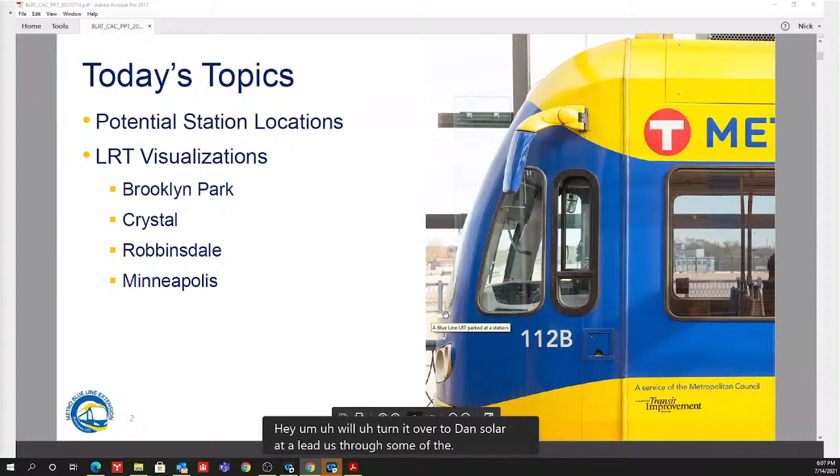Okay, we'll turn it over to Dan Soler to lead us through some of the preliminary station discussion. Well, thanks everybody, happy to see folks tonight on a rainy Wednesday, rainy here anyway, maybe stopping, but good night for a CAC meeting.

So we presented similar information on stations and visualizations that you're going to see tonight at the Business Advisory Committee yesterday, and we'll share similar information with the CMC. This information on stations and possibilities for LRT is all work that we want to engage with in our open houses and public meetings through the remainder of the month of July. So what are we doing?

We're looking for feedback so we can continue to advance where stations might go, how they're configured, and feedback on the visualizations we have—side running, center running, different configurations of LRT. After these advisory committees, we're bringing this out into the community at a number of public meetings. May see some of you there—some virtual, some in person. We've got meetings in every city, and we expect ongoing discussion for the next several months as we continue to look at what works and refine these design options.

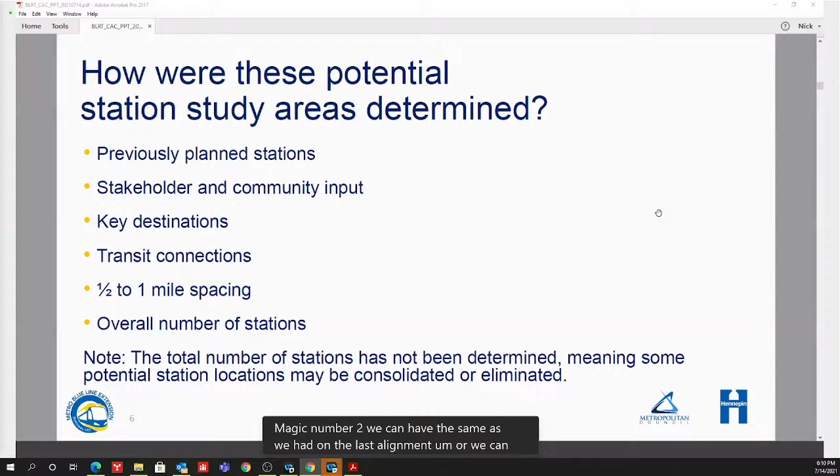We looked at a balance of the overall number of stations, so the total really hasn't been determined. There's no magic number—we could have the same as the last alignment, or less, or more. There's no real magic to it, other than: have we served all the areas we need to, and have we kept it a functioning LRT route that maximizes ridership, minimizes travel time, and picks up and serves residents and businesses, but at the same time doesn't stop every block.

The first part was very easy in northern Brooklyn Park. Up there, we're proposing that the 4 stations along West Broadway in Brooklyn Park continue and remain part of the project. This is the segment that runs from 73rd up to north of Highway 610 along West Broadway. We previously had 4 stations along that segment, and these 4 station areas have had a tremendous amount of station area planning done in and around them.

They are serving key destinations, transit connections, and are pretty much fully designed. Brooklyn Boulevard would still have a station in and around the commercial and retail area, as well as the Starlite Transit Center. Up at 85th, of course, is North Hennepin Community College, Hennepin County Library, Center for the Arts and School, Maplewood townhomes, and other development proposed and existing in and around that area.

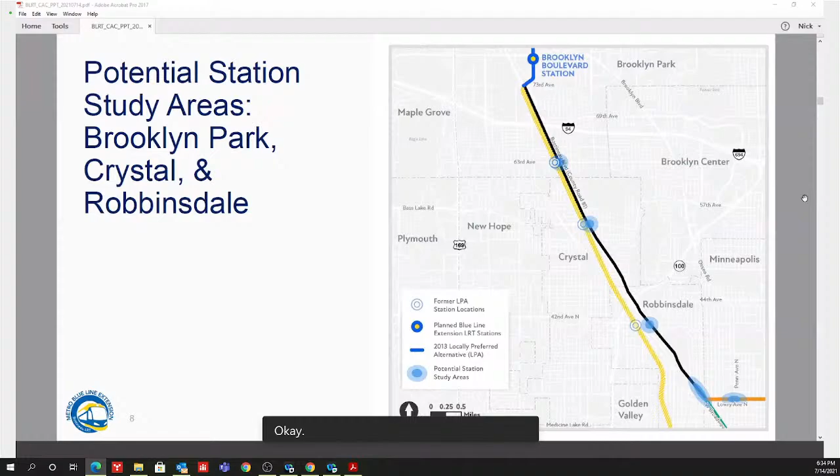There's no station on 73rd. Hello? I'm sorry, I think Kathy was asking a second question, but we lost her. The internet started buffering and we lost part of it. Yes, you froze for a touch, Kathy, and then came back. Go ahead and start again.

Yeah, so currently it looks like there's no station on 73rd. So Brooklyn Boulevard will serve the 73rd Avenue businesses and people that live over there. And the distance from 73rd to Brooklyn Boulevard appears to be a little over a mile. So I'm just wondering what was considered there in terms of reaching some of those communities and businesses on the 73rd area.

No, you're challenging me to think about the past. I know we had always proposed a Brooklyn Boulevard station because of its connection to the retail there and the Starlite Transit Center and other spots. And then, of course, the next station is south at 63rd. So I don't know if we'd considered a station in the middle. I just don't necessarily remember that.

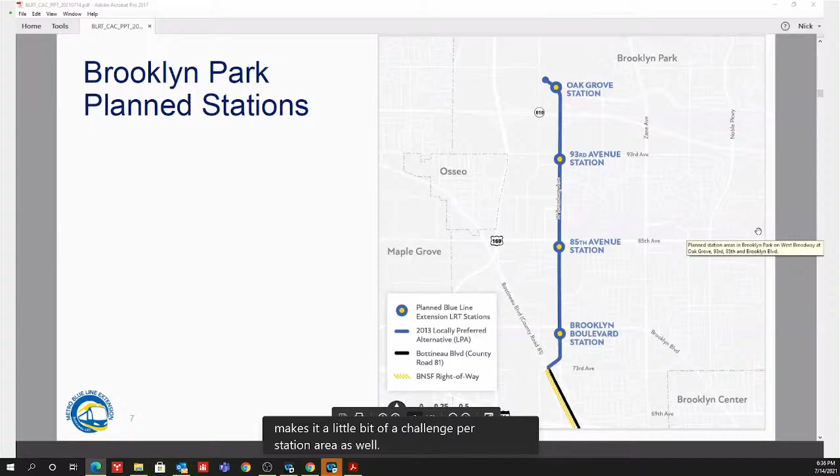Are we ready to go to Catherine? It's just a quick one, Dan. I've been looking for a traffic study other than ridership. Is there a traffic study for the amount of traffic on both West Broadway and Lowry when we're talking automobile and the potential impact of rerouting from Washington?

Okay, so yes, we've pulled together a traffic study that looks at volumes along West Broadway and Lowry, and what the conditions are today, what the conditions would be if we built LRT, right Nick? This is all true, correct? Yeah, that's true. We've pulled the existing studies, yes.

Tell me, what was the last part, Catherine? Was it about the turn? Is that what you were saying? Yeah, I mean, of course, you're looking at a turn either from Washington to West Broadway, or Washington to Lowry. So is there a study from other projects that talk about that interaction between a turning train and traffic?

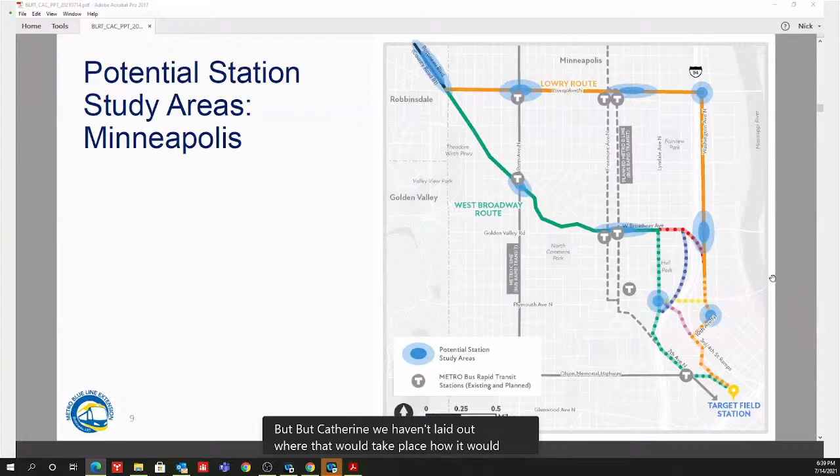With Adam waiting to ask a question - thank you, thanks Dan for everything. The question I have is looking at the route, there's two main grocery stores that I see on the route in North Minneapolis and Robbinsdale, and they're both a tad far away from the proposed stops. Has there been any consideration about moving one of them a little closer to either the Cub on Lyndale or the Hy-Vee up by North Memorial?

Good question. Let's start with Robbinsdale. Part of it has been, do we go a little further north with the North Memorial Station, so we would serve the hospital to the south and Hy-Vee and North Memorial's ambulatory clinics, or would we stay closer to the hospital?

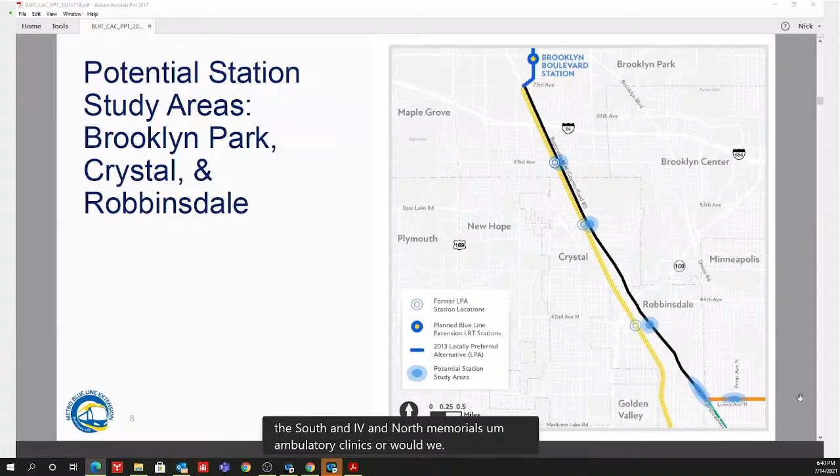That's a consideration, a discussion, a balancing point there to get closer to the Hy-Vee.

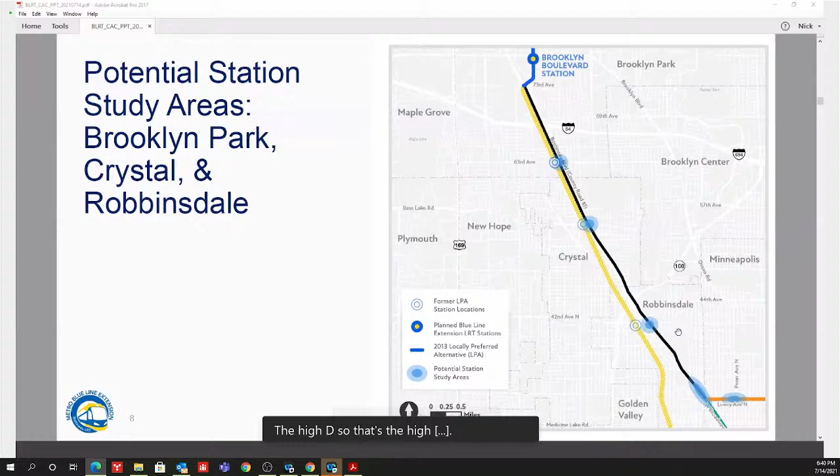In Minneapolis, that's why we see that longer stretch, because I consider how we're serving everything with that station, from the Cub at Lyndale all the way to the best connection for D-Line riders north and south on Emerson. So you've got that number of blocks in there, and are we shifting this way or that way? Where does the station end up on Penn? Where is there available right-of-way to do the widening?

Brent talked a little about his work, and we also got a comment from the park board that they're putting a lot of improvements into North Commons Park. So should we be leaning more towards Emerson with that station, to be a little closer to North Commons Park? But that's all part of it - we can't serve everything. So where do we use signage, pedestrian facilities, and where do we put the stations to get the maximum benefit out of it?

The grocery stores are great examples, Adam, of key destinations. I've certainly seen so many people on University Avenue, from the Walmart and the Cub that's there, using the train east and west. So grocery shopping is a big piece of it - those are both key destinations in those cities.

I know you said there's no number in mind and you want to keep that half-mile distance, but when we get down into metropolitan neighborhoods, is it ridiculous to go less than a quarter mile, or is it affected so much that it's not feasible? Less than a quarter mile's too close, Adam - just too close for an LRT line.

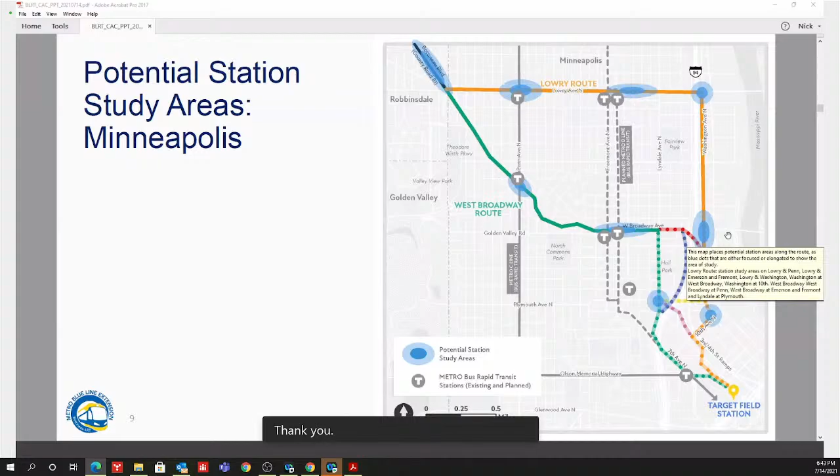I think we'll go ahead and move on. Oh, go ahead. Yeah, I'm sorry, that was me - I'm looking for my hand raising and everything, it's just not working for me. Okay, this one works too, so that's good. I'm just going to blurt it out on this one.

Just to refresh my memory - what is our proposed runtime from Target North or that area all the way down to Target Field? What are we projecting right now?

I don't know what we're projecting per se as much as what we were at. We were at 31 minutes, right? So yes, we're on 31 - we were at 31 minutes from Target North Campus, Oak Grove Parkway Station to Target Field. On the previous alignment, we were at 31 minutes.

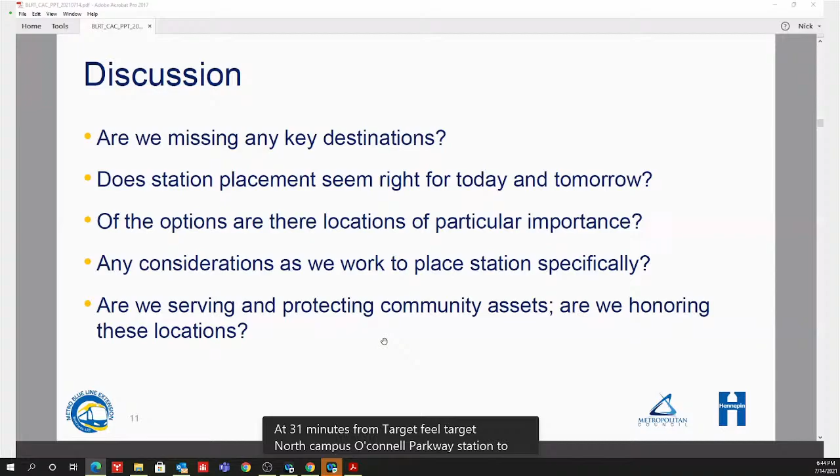So inevitably, Brett, the run time's going to be a little longer than it was before, because we're in so much street running now. But we're also probably adding some stations and replacing some that I'd guess will have higher ridership than stations on the previous alignment. Hopefully we find a balance there, and maybe we're in the mid-30s to upper-30s runtime, but still getting 28,000 riders a day. That would be great - we don't know that yet, but that's what we'd like to shoot for.

Got it. Follow-up question - is the frequency on the trains every 10 minutes? Are we looking at that as well? That's what the current Blue Line is, and we would propose to stay on the current Blue Line schedule of 10-minute headways for most of the day.

Excellent, thank you. I got my hand up. Yes, Catherine.

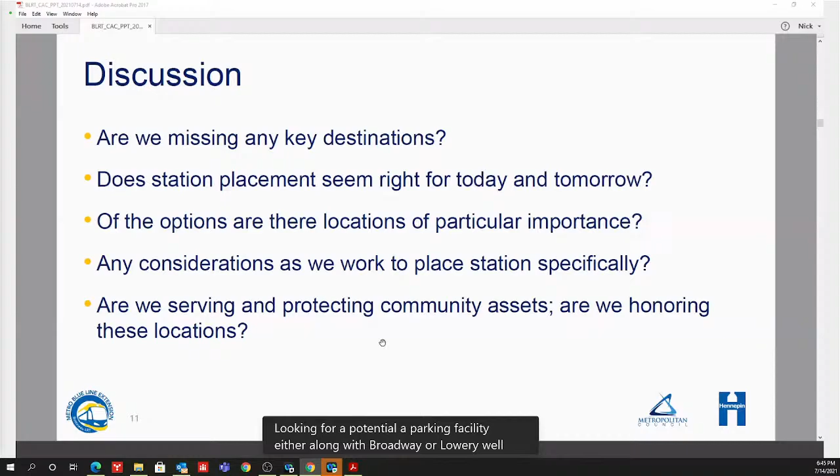I know there's been some discussion about looking for potential parking facility, either along West Broadway or Lowry. Will that selection have an impact on the station locations, or have you found potential areas where you might build or utilize as a parking structure for the businesses along either one of those corridors?

We have not. That doesn't mean we haven't looked and said, oh, interesting, that one segment of the Cub parking lot near Lyndale, as I've looked at an aerial photo, never has any cars in it. There are some possibilities, but as it relates to station placement, Catherine, that hasn't been as big a concern.

I want to be very clear here, we're not talking about building park and ride. Any parking we build is for the use of businesses along the corridor because of the reduction in on-street parking availability. We do not want people to come as far as North Minneapolis and park in a park and ride that is intended for businesses, to then take the train to the airport. That's not the purpose of it.

We need to be diligent to get the parking where it's needed for the businesses, and the stations where it's needed for the riders. That's different from when I talked about Robbinsdale, where as we look at where we might put a station, where we might put park and ride spaces is different. There we're trying to provide some park and ride spaces because we don't want people to park on street in business parking, and it's kind of vice versa in North.

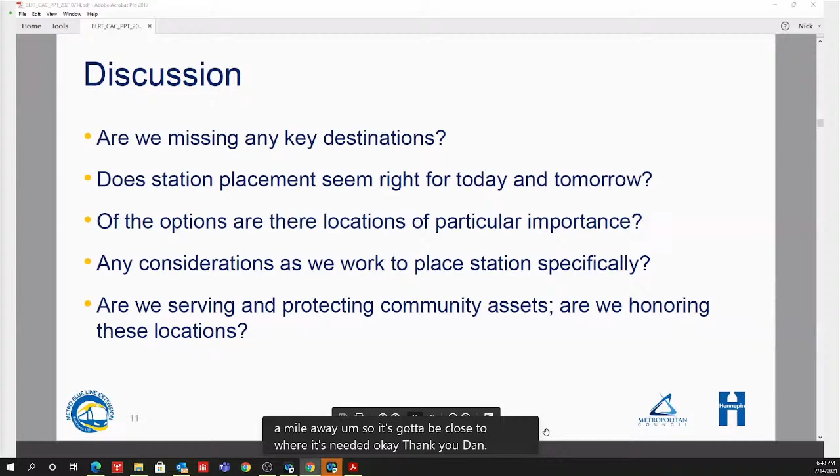So anyone else, Sophia? I'll turn it over to Nick and we can talk about the visualizations. A lot of exciting stuff to see there as well.

Yeah, so thanks everybody, good evening. Just as we roll these out, I think some of you may have seen a few of these visualizations, and what we're going to show here is just some representative ones, visualizations at key spots along the corridor. It's just to get an idea, the context as we're going through, starting up at Brooklyn Park and down through Crystal, Robbinsdale, and into Minneapolis. So these visualizations are to start that conversation, because a lot of folks are saying, well, how does this fit within there and how does it work?

So we're rolling these out here. You'll notice there's not a lot of dimensions on them right now. We know we have a certain amount of space, but as we're going out to the public and getting some feedback and working with the city and the county on these, we'll start appropriating the space that's out there for roadway, for sidewalk areas and whatnot. Also what you'll notice on a lot of these visualizations is we're not showing a lot of landscaping at this time. It's really to let everybody get an idea of what the context, what the massing is within the available right of way that we're working with.

We do need a lot of work to do when we get to intersections, we're not showing intersections at this time. We've got to work with our project partners, the city, the county, on how intersections are going to operate, how we get left turns in, where we put bus stations in these areas. So this is a lot of work we got to do, but this is the initial rollout so folks can get in their head how this actually works. So I'm going to start out on the north side here.

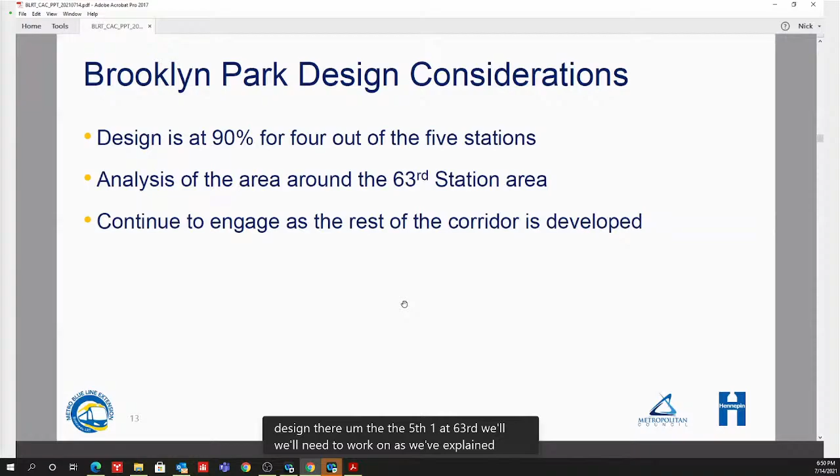But we want to continue to engage with the community in Brooklyn Park, because it's been a year and a half, 2 years since our last meetings with folks there to explain where we're at with the project. So it might not be fresh with them, or they may have forgotten where we're at, or just haven't known about it and they're just newly engaging in it.

So the exhibit I have here is coming from our 90% plans for the 85th Avenue Station area plan. And as we get farther in development, in design, we start knowing how the station platform is going to fit here. In this case, we're center running down West Broadway.

We start knowing how we incorporate the pedestrians and bike facilities on either side. We start looking at the road design and how we can refine intersection design and how we can focus on safety and pedestrian crossings in these areas, and how we connect to the areas around.

So in this example here, we have that center station. As we look at it, we have access to that center station. This is fairly typical for a center station at an intersection. We use that intersection as access to one side, and then on the other side, we'll always have 2 means of access to a station.

So on this back side here, you'll see we have a pedestrian access that goes to and through the station across the road. We'll talk a little bit more about this crossing, but as we get through it, we'll have signals that pedestrians can push a button to activate the flashing stop signs for cars. Cars that are coming through can stop, letting the pedestrians across.

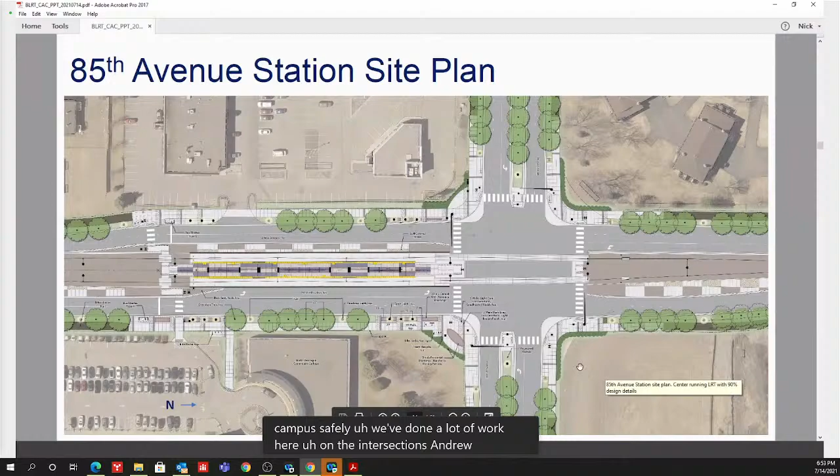So we have really good renderings in this location of how the center stations would work. In the previous design, all our station platforms had the same footprint. They were all center running stations, so they all had the same footprint, which is convenient for our riders and folks visiting, so they know when they get on the station what to expect.

There's going to be card readers as they get on, so they can either tap their Go-To cards, or there'll be ticket vending machines right there up front so they can buy their tickets. They're all in the same spots, as well as the signage letting folks know which track they're coming to. And then we'll have the video signage up there to announce station or train times, when trains are coming in, and which side of the platform they need to be on depending on the direction it's going.

Also, as we worked on this project on West Broadway, we did narrow down the traffic lanes so we could get everything to work within that right of way, and that helped provide a safer pedestrian experience by narrowing down that conflict area with vehicles, and less time a pedestrian would have to be out there in that location.

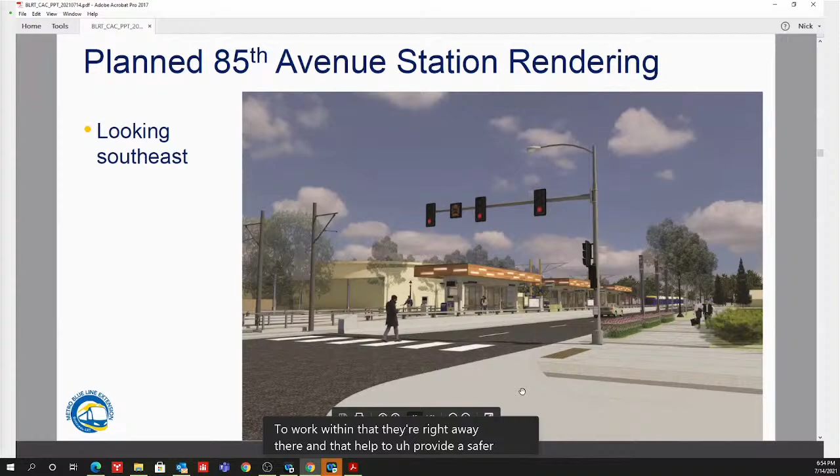Same one, just looking at a different angle. This is at the south end, south of 85th going into North Hennepin Community College, where there's a pedestrian-only crossing. That's how it works with pedestrian push buttons, where they can bring up this sign and have flashers to let vehicles know pedestrians are crossing.

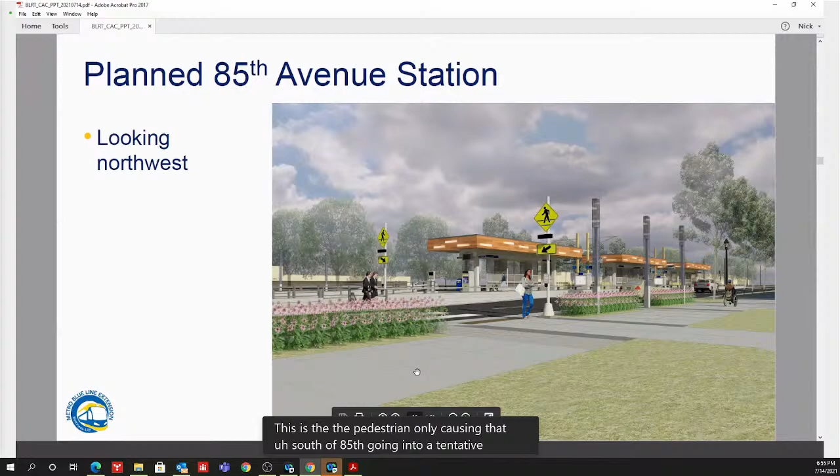This is a good view of what the station platform will look like, with the shelter areas, heaters, lighting, cameras in place, the signage for folks, and the informational signs on train schedules and whatnot.

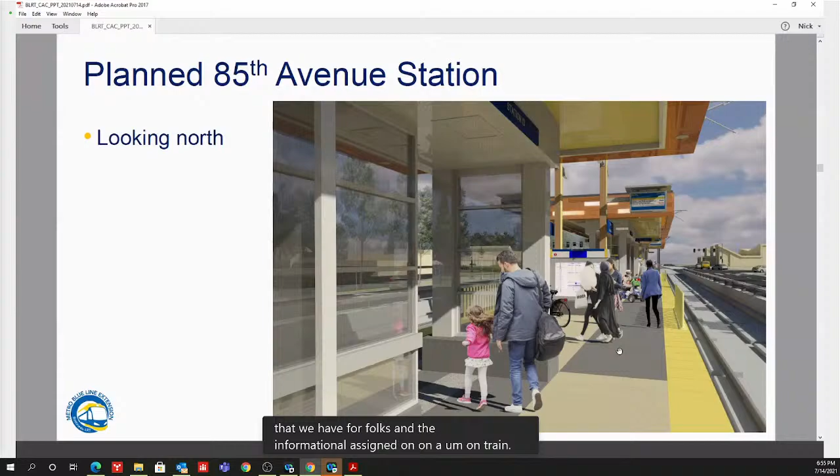So that was Brooklyn Park. Again, it's just a recap of the work we've done, and the 90% plans we're at. So as we go down into Crystal, are there any questions on Brooklyn Park before I go forward?

Okay, with that, I'll jump down into Crystal. As we go into the Crystal design considerations, we need to confirm that center-running at grade on County Road 81 works, and working with our project partners and the community on that, and how it lays out and where the stations go in.

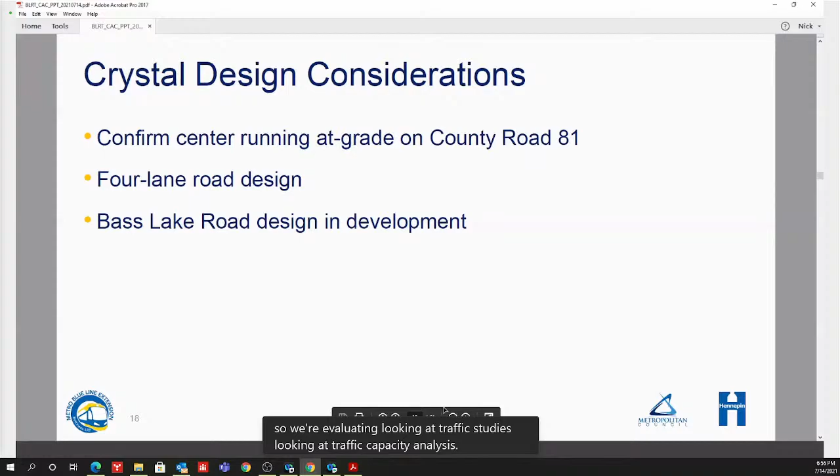Also, in this area, County Road 81 is a 6-lane design with the center-running light rail going down it. We know that we'll have to take a lane from there, so it'll become a 4-lane road design. So we're evaluating, looking at traffic studies, traffic capacity analysis, and how the intersections will operate.

And that they still function at acceptable levels through there. As we looked at with Bass Lake Road, we'll look at that design in development and how a station fits in there, moving it out from where it was in the rail corridor, out into 81 in this location.

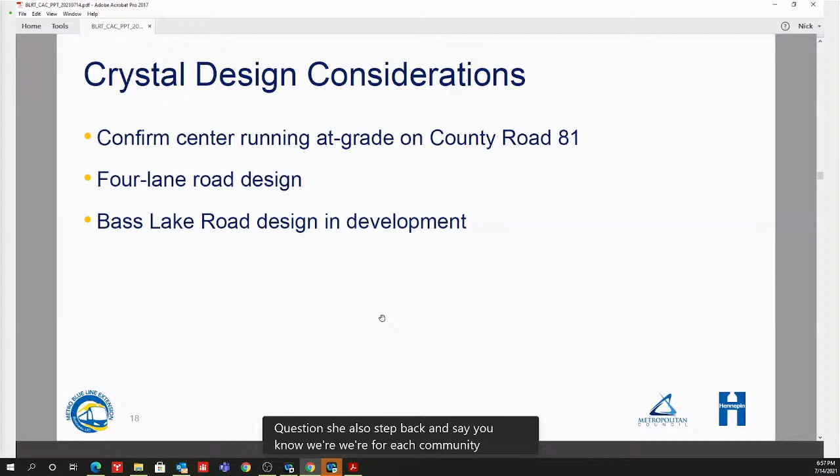I should also step back and say, for each community, we're putting together quite a few visualizations you're going to see here on representative areas along the corridor. I'm just showing you a few of them in each community right now, for interest of time, because each community will have a pretty good library of them and representative spots along the alignment and routes.

So this is an example of some of the renderings we're putting together for visualizations. We'll have these out as either a presentation like this virtually, or if we're at public meetings, we bring these out on poster boards, so folks can go up there and take a good close look at how things lay out and see where they're at.

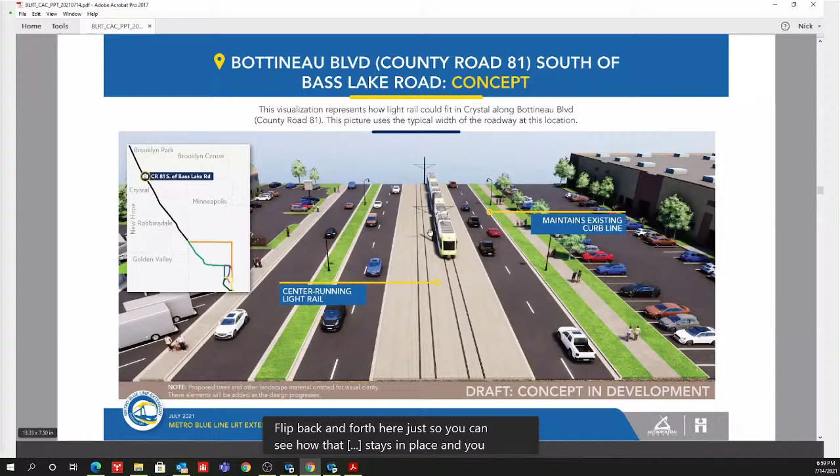I'm going to jump down here a little bit farther south down County Road 81 in Crystal. This is at 48th Avenue.

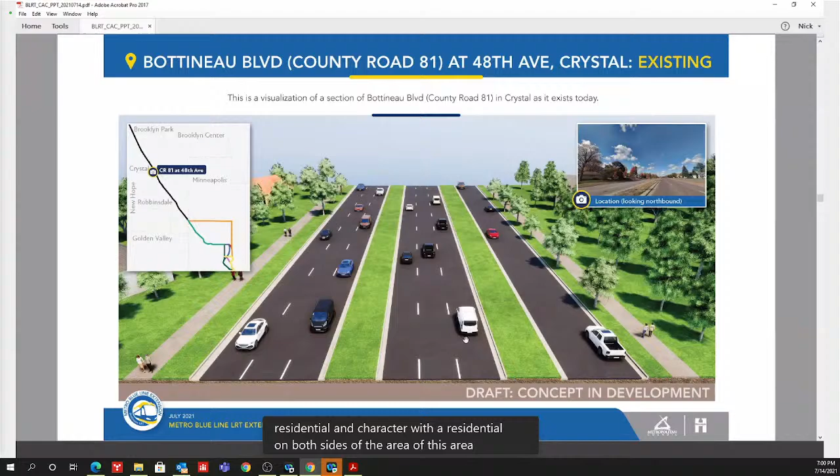Again, a 6-lane roadway through here, with a center median in this location. This area is more residential in character, with residential on both sides. There's a frontage road here on the east side. As I go down, this is how the center running would fit in that corridor with 2 lanes in each direction, maintaining those frontage roads, pedestrian access ways, pedestrian trails, and bike trails on both sides.

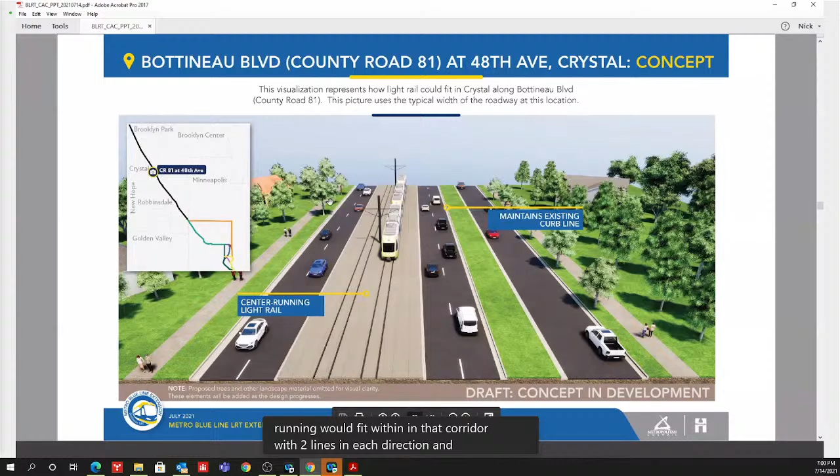Any questions on Crystal as we go through?

Okay, so next we're going down to Robbinsdale, and some of the same considerations apply. We're going to confirm center running at grade on County Road 81 in Robbinsdale. There's quite a few intersections since we're in the downtown area that we're looking to maintain, and we believe we can maintain those intersections and the full movements.

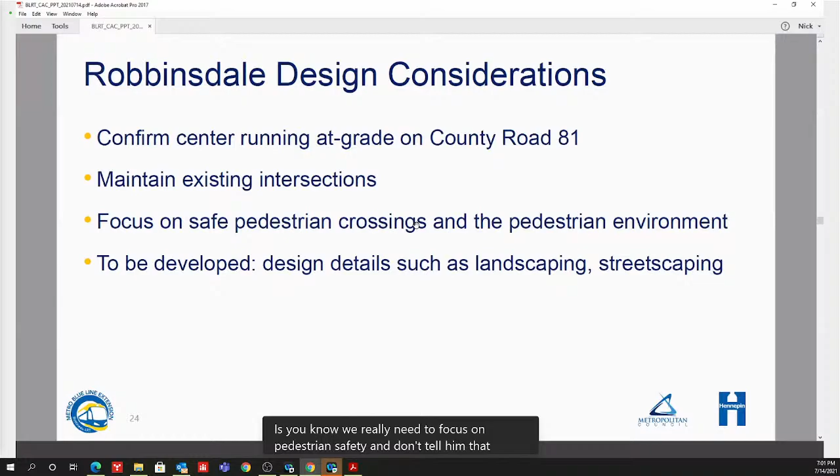We want to really focus on pedestrian safety, the crossings, and the pedestrian environment, based on feedback from our advisory committees and the community. That's one of the key focuses here — we really need to focus on pedestrian safety in downtown, with the highway there and then putting a train there too. We want to make sure it's safe and accessible and doesn't divide the community. What we're going to work on as we put this together is developing those opportunities for safe crossings, and do the best we can to help pull things together so it doesn't become a divider.

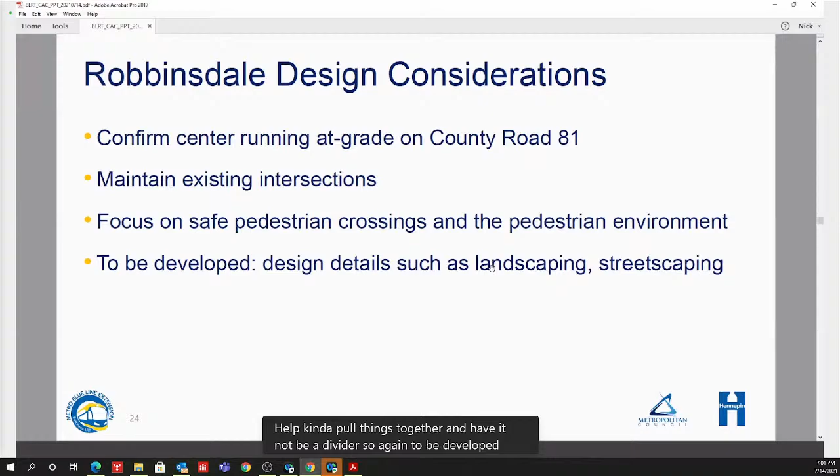So again, to be developed as we move through this will be the details, such as there's landscaping out there right now — how do we replace that landscaping, and how do we work with the streetscaping as we go forward. Those are things we'll really dive into as we get into design, but again, this is for the massing.

This is County Road 81, Bottineau Boulevard. We're looking north, just above 40th Avenue, with 41st up ahead in the distance. This is the town center up here. You'll see we have a pretty good sized retaining wall existing today with parking above it, and there's actually underground parking behind this wall in some locations. We have a sidewalk or trails on both sides, a median here, turn lanes that are left turning onto 41st, and also right turns into the Robbins Center Shopping Center, both the lower and upper centers.

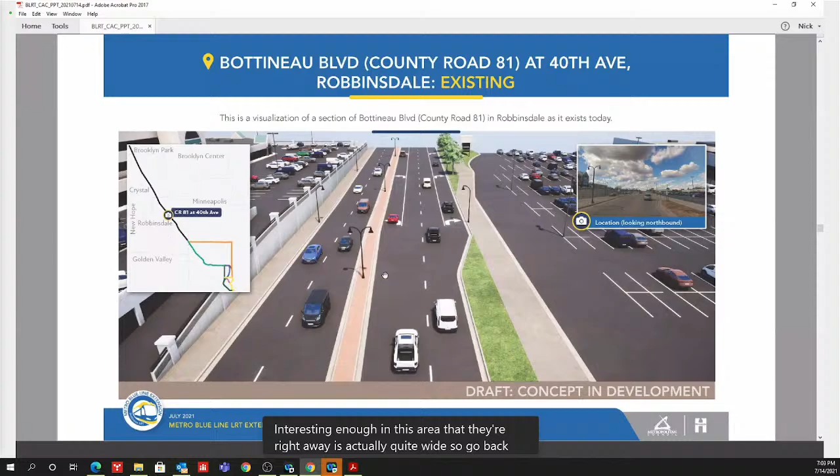So this is what it looks like today, and you can see with the center running here that it does expand out. Interestingly, in this area the right of way is actually quite wide. Go back to the existing view — the actual road right of way, or public right of way, goes up almost to the striping on these parking stalls in this location. So as we're looking at it, we're able to maintain pedestrian access out here, and we'll continue to work on how we provide the best environment we can on both sides.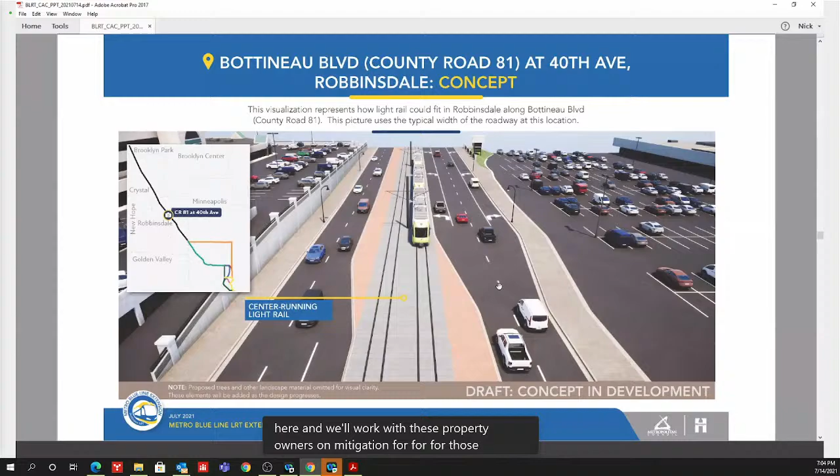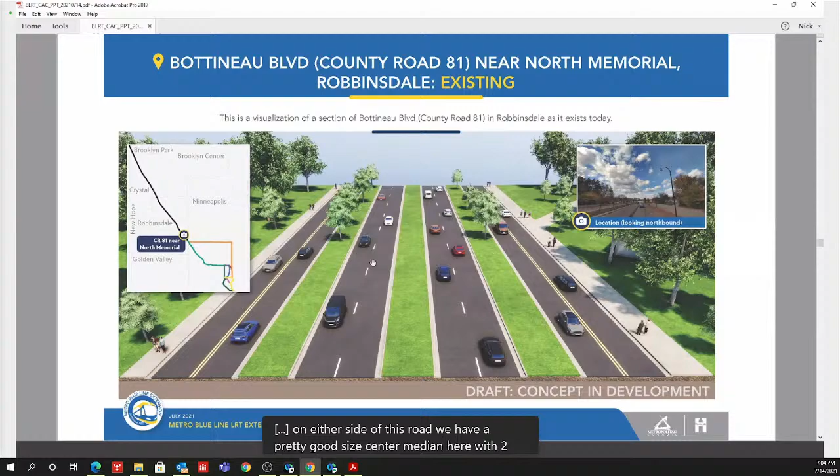I'm going to move down a little farther here in Robbinsdale, getting near North Memorial — so we're kind of up by North Memorial, with 35th down here in front of us. We have a frontage road on either side of the road, pedestrian walkways and trails on either side, a pretty good sized center median with 2 lanes of traffic in each direction, and a good sized boulevard that separates the frontage roads from the through lanes.

As we flip forward here again, we stay pretty close to those existing curb lines, using up that center median, maybe taking a little bit of the boulevards on either side, but we're able to maintain in this location the frontage roads on both sides here, able to maintain pedestrian ways through this area. So that's Robbinsdale in this area. Any questions here, concerns, comments?

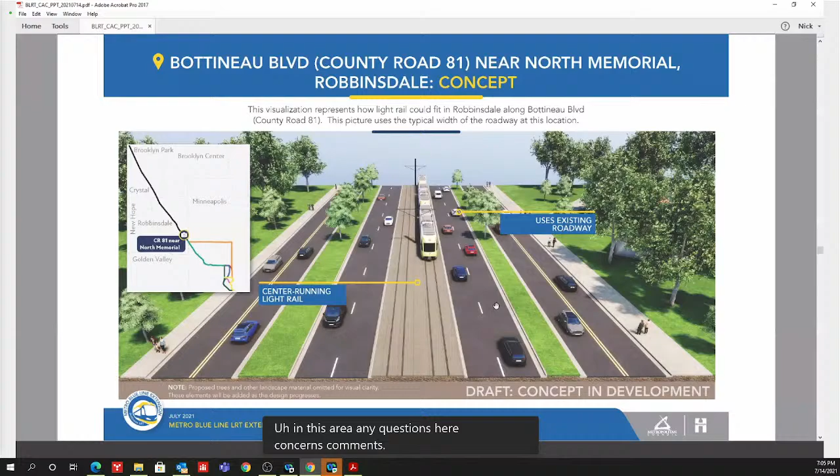All right, so let's jump down into Minneapolis, and this did this to me before. Sophia, you might need to take over here because it's stalled out on me, it looks like. I'm going to stop sharing. Hey Nick, I will see what slide you were on. Slide Robbinsdale, slide 33. Apologize for it, for some reason it seems to time out on me when we get to slide 33.

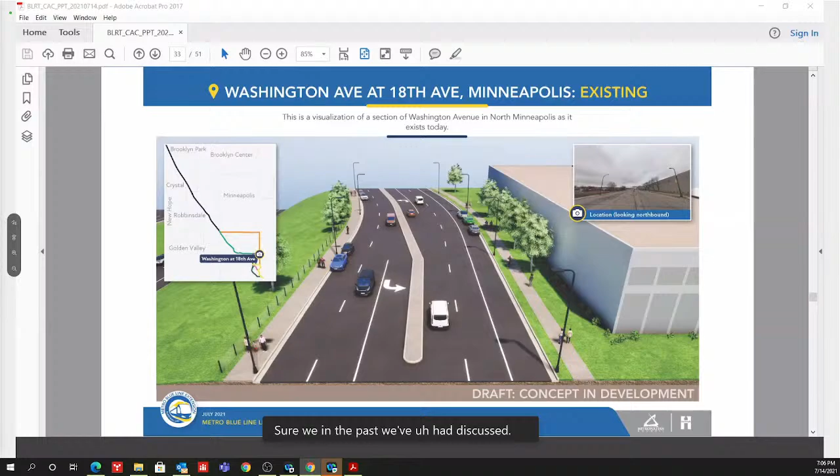Well Nick, while we're waiting, can I ask you some kind of generic questions? Sure. In the past we've had discussions about silent trains and some of the issues that were on University. You mentioned that you were going to take special safety precautions in Robbinsdale because the folks would be so close to the train. The train has no whistle. Is that still correct? Well, I guess typically when we're running in that condition, we wouldn't be using a whistle.

As they come into a station, they'll use a bell coming into the station, so to let folks know on the platform it's coming in and warn them, because it is quiet. We'll take a look at how we can best get pedestrians to and by the station and get them squared up with the train so they're looking that direction and hopefully not just looking down at a phone or something like that.

Well, they're going to be looking at the phone, but as I mentioned before, by the time we get the whistle, I can already see the train. I need to hear the whistle or that it's coming before it gets there.

Yeah, and also when we had Olson Memorial in the plan, we had a lot of cultural input along the rail. Communities inputted their design and requests and things that better identify the neighborhood through which the train was flowing. Is that going to be part of it? Are we using any of that artwork and those renderings, or how's that going to work?

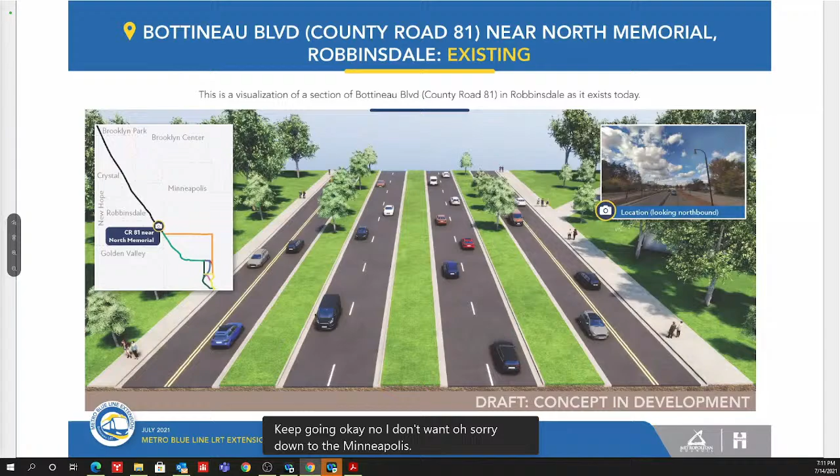All right, thank you, Nick. Get back to your slide that you were avoiding. I'm not avoiding it. That's why Sophia had it ready to go. What was the next slide, Sophia? Is this our next one? No, go up. Keep going. Okay, no, down one. Oh sorry, down to the Minneapolis discussion there. Yep, right there. Too far, right there. Can we stop? Thanks. It's lagging, but it's showing. Yeah, we've also got to resize the video.

Okay, so in Minneapolis, what do we need to look at? We have at least the two route options we've rolled out: the Lowry Washington options and the West Broadway options, and then also as we get into links, how those come in. We want to take a look at some of these concepts along those two routes and how things will fit in.

We'll need to spend a lot of time on this as we look at it. There's pedestrian and bikeways out here — Lowry has a bikeway along it. As we roll through, we'll have to figure out how to accommodate those bikes and that bike route. Can we keep it in the road, or do we need to mitigate it and maybe move it a block off? We understand we need to take care of that. Landscaping and hardscaping is another thing that'll come down the road as we determine how these lay out.

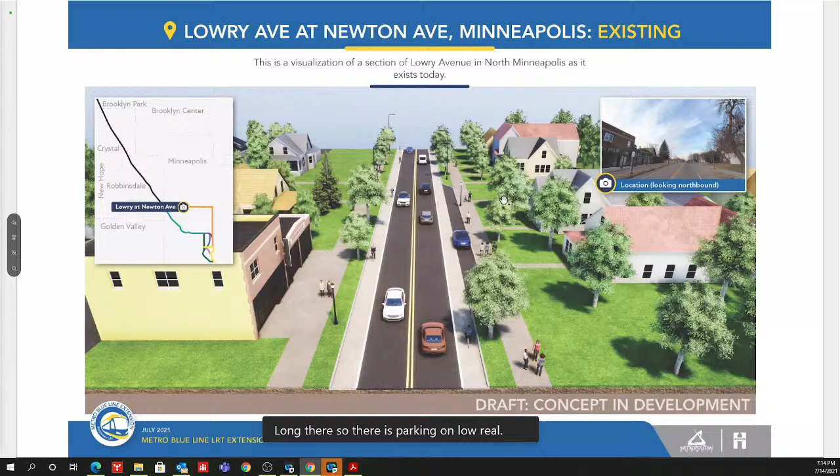Next slide there. So this would be center running, and you can see this really widens out that footprint — more of the roadway and sidewalks in this location. It pushes it out closer to the properties there. We'd still stay within right of way as much as humanly possible. This photo shows the center running guideway, and our guideway, as we've said before, is a 28 foot minimum guideway — 28 to 30 foot is where we need to be, depending on if we need signs or signals in there. But that guideway has not a lot of room to move.

So what's left with room on the outside is what we need to allocate for traffic, pedestrians, and bikes in that location, and then the other amenities that would go into boulevards. This location shows a little bit different color as we get out to the sidewalks — we have sidewalk on either side, and a colored band for a boulevard that can be used for different amenities, whether it's wider and planted, or narrower, or used similar to what we did on University for stormwater runoff and treatment, and whether trees would fit in this location. Those are all things we'll need to look at as we get into design.

What you'll notice in this photo is we have one lane of traffic in each direction, similar to what it was. We do mark it here because there was a bike lane before — we have those bike sharrows, as they're called, shared lane markings in here. We need to determine, as we go forward, how we maintain or mitigate for bikes along here. Do we maintain bikes here? How much room do we need for it? What's the condition we feel is best to accommodate that?

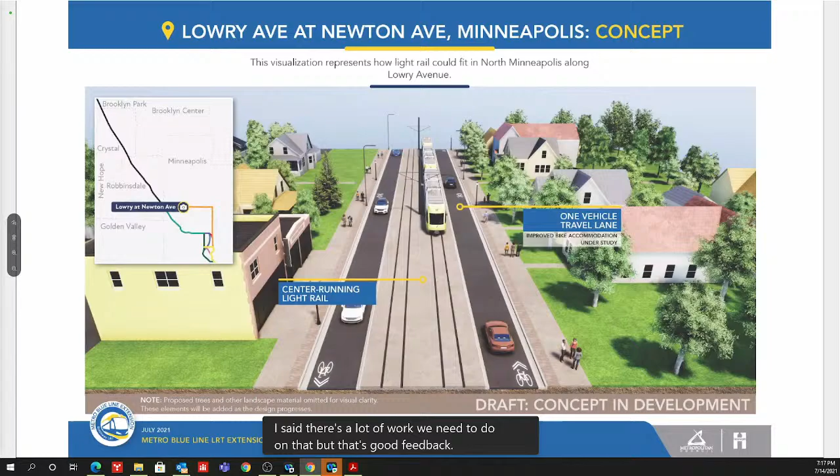I appreciate the comment, and like I said, there's a lot of work we need to do on that, but that's good feedback. All right, let's jump to the next slide, please, Sophia.

So this is a view or concept of Washington Avenue, about halfway down Washington Avenue by 18th. The existing view, so it's 2 lanes of traffic in each direction. We have turn lanes in there. There's parking on both sides of the road in this condition. Underneath that key map is where 94 is. You can kind of see little parts of it down there, and the grade or the slope down into the I-94 corridor.

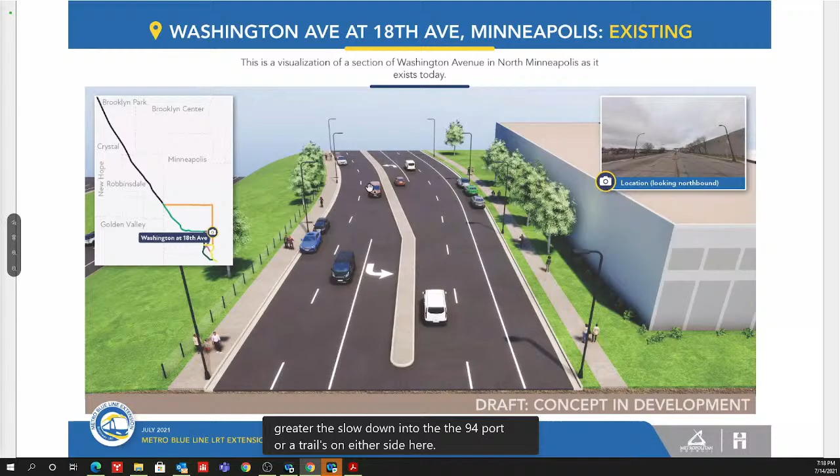Trails on either side here, or sidewalk at least on either side of this. So next view, this would be a center running LRT down Washington. We're able to maintain a lane of traffic in each direction. We're showing a left turn lane here. We can continue with the pedestrian way, maybe a little bit more enhanced on pedestrians, and we're showing the possibility of getting a parking lane on that outside or that southbound lane.

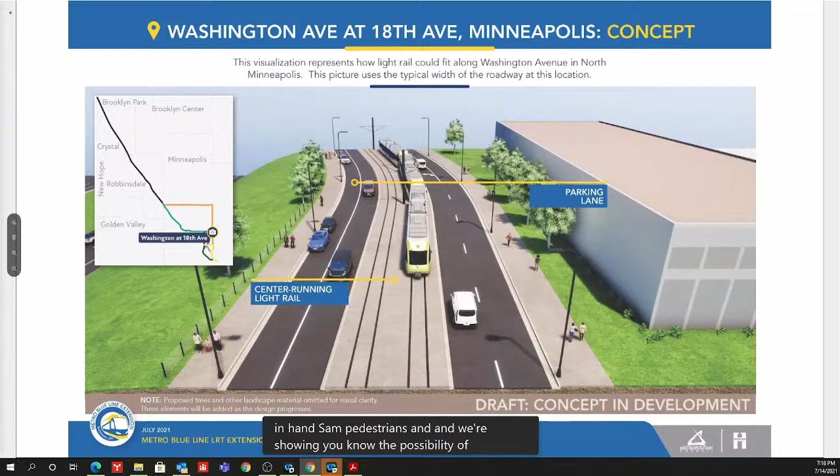So next one here is moving over to West Broadway. I don't know if there's any questions on Washington, but West Broadway, this is by Queen Avenue, the existing shot. So this is a 5-lane section, 2 through lanes each direction with a center turn lane down there. This is kind of a little bit more residential with single family on that southwest side, and then the northeast side apartment building or a little higher density residential in this location. So sidewalks on both sides here in this location.

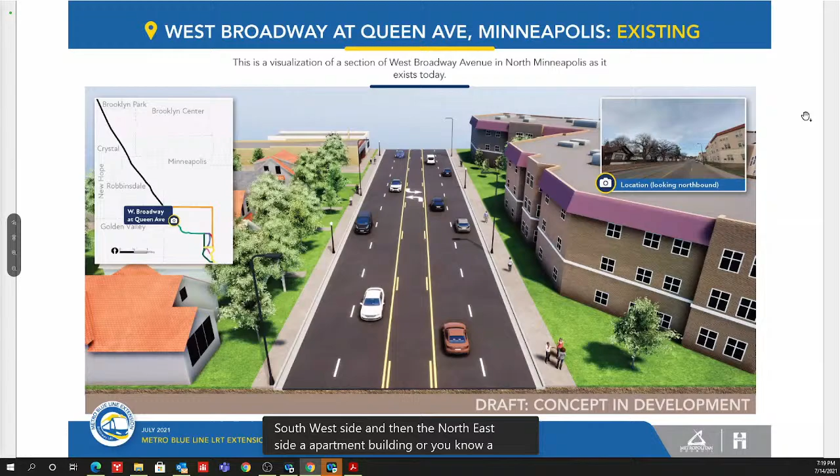So can we go to with a light rail? So this is where you can see it gets pretty significant. We go from a 5-lane section to 1 lane of traffic in each direction, able to maintain pedestrian ways throughout here, and fit within this corridor.

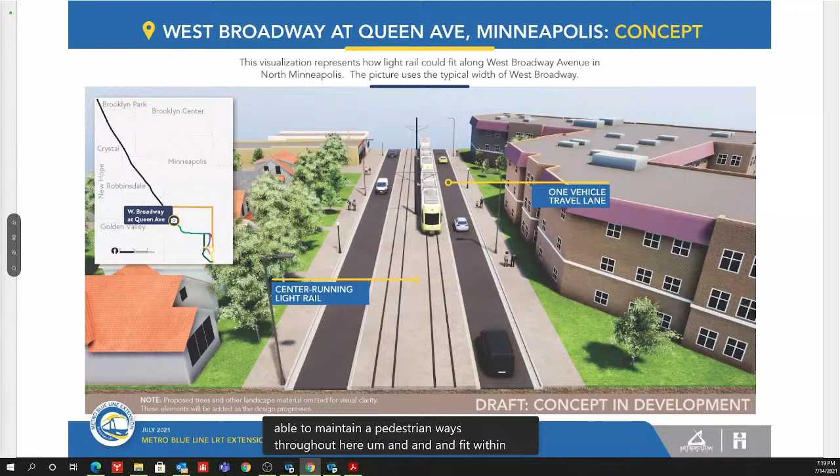Next slide, this is going to West Broadway and Emerson. So as you can see here, this photo is kind of taken right at the intersection of Emerson, looking north, and how it fits today. A little bit more commercial in this area, 2-story buildings in this area, parking on both sides, sidewalk on both sides, and 2 lanes of traffic through here.

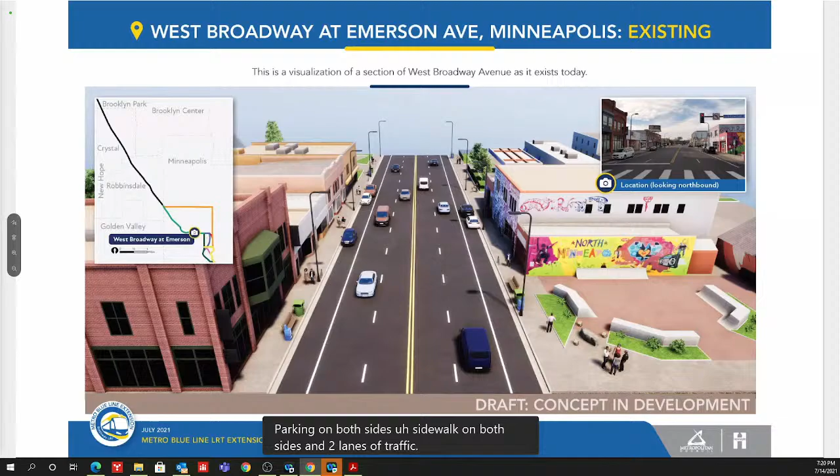So let's switch to there. This is how light rail fits through there. So 1 lane of traffic in each direction. We get the sidewalks on both sides. Again, there's a lot of work that we'll need to do with the county and the city and design to how we allocate that roadway and keep adequate roadways so we can have vehicles on there, but also make sure that we're paying attention to pedestrian movements through here.

Obviously, as you can see on this, there's not the opportunity for parking here. There just is not that room. So this is some of the discussion we have as we're starting to look at analyzing what the parking is out there and what our options are for mitigating that parking. What is a toolbox that we have for us to make up for loss of parking through here, and how do we continue to do that to support the businesses in that community?

Can I ask a question right now, Nick? Do you mind? Sure, I know I'm jumping ahead to your elevated and side running stuff, but I'm curious—if you go back one slide.

Does that option at grade center running allow you to widen the sidewalks on Broadway? Because currently you cannot walk too wide on it without almost being in traffic.

Yes, it is a narrower sidewalk on both sides right now. I think, depending on how we allocate the roadways, my belief is that we can give back quite a bit more to that walk zone, and make it more inviting and comfortable for pedestrians, while still maintaining good traffic flow and good lanes of traffic.

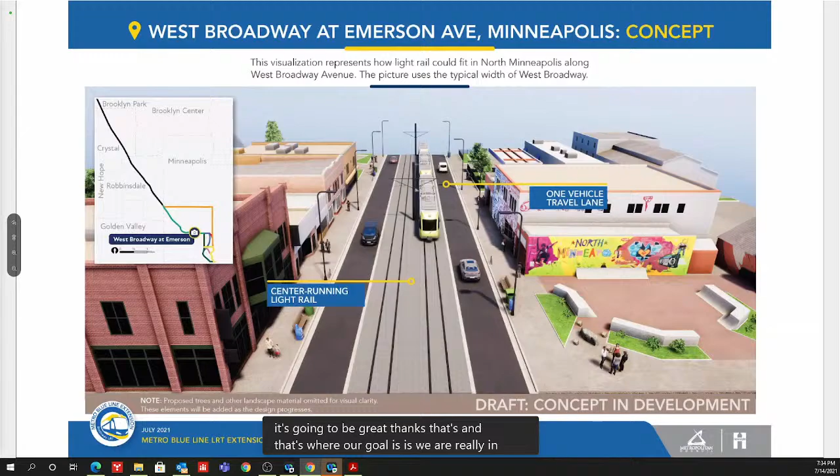Hopefully you guys can still see the screen. Are we on the page? I've lost the screen. Side running, elevated intro slide. Where we are, so I'm going to try to walk through this a little bit with the elevated section. So that slide is up, Sophia? Yep, it is now, Nick.

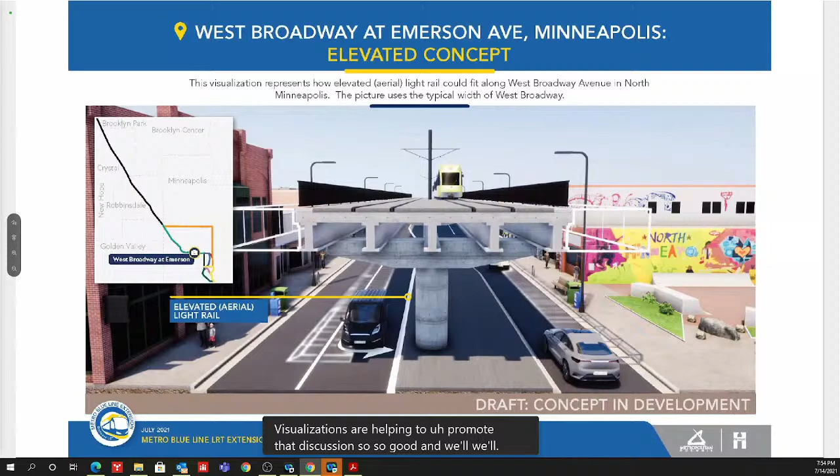Nick, just say one last recommendation, because I know these things are going in front of community members and all those type of things. I think having one set of renderings around one station where you've got some things around the surrounding community, a street north, a street south, this is how bikes might work, this is how the pedestrian stuff might work, I think that would be helpful as you're taking this out to smaller groups. You can't do this all the way along the line.

But just reminding folks again and again that there's a bigger path here that needs to be figured out, and we're aware of it. We're not going to forget about it. We've got renderings around it. This will be a part of that program. I think that would be beneficial to your sales process going forward.

Roll plots to kind of get into the weeds of those details. That's a good point, and that's what we do. We will use those roll plots and stuff where we have a broader map for those discussions. So thank you. Let's talk a little bit about what are the other. I think Catherine might have had one more thing.

Nick is an engineer, and the things he does are engineer-ish, if that's a word. So to the gentleman's point, if you make it a little more relevant to the smaller groups, you'll definitely have a bigger win. The information is great, but gearing it more toward your audience helps. Well, thank you. I do a lot of things that are engineer-ish every day, Catherine. So that's good.

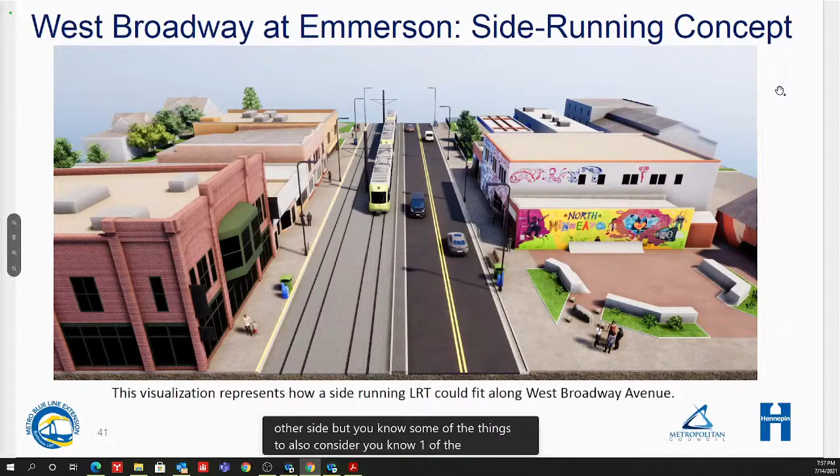One thing we want to bring up as we look at side running, you might think it consolidates things a little, keeps traffic on one side and the light rail on the other. But some things to also consider, and one reason we're not recommending it but it's out there for consideration, is that side running does have a lot more impacts.

Where we have issues with left turns, those are compounded with right turns across the track as well. Anytime we have a crossing on the track, we need signalization to control traffic going across it. So side running is more impactful to the side it's on, since if we're crossing that track with traffic, it needs to be signalized. Any driveways, alleyways, or unsignalized streets would potentially be shut off or closed down in those locations.

So it really has a heavy impact on how traffic flows through the areas, especially in this downtown area. Now, there's side running in other areas where there aren't those conflicts or crossings, and it works really well. But when you have more streets, alleys, and driveways, it brings up a lot of issues. The maps here show along West Broadway that the impacts of driveways, accesses, and streets are pretty significant, whether it's on one side or the other.

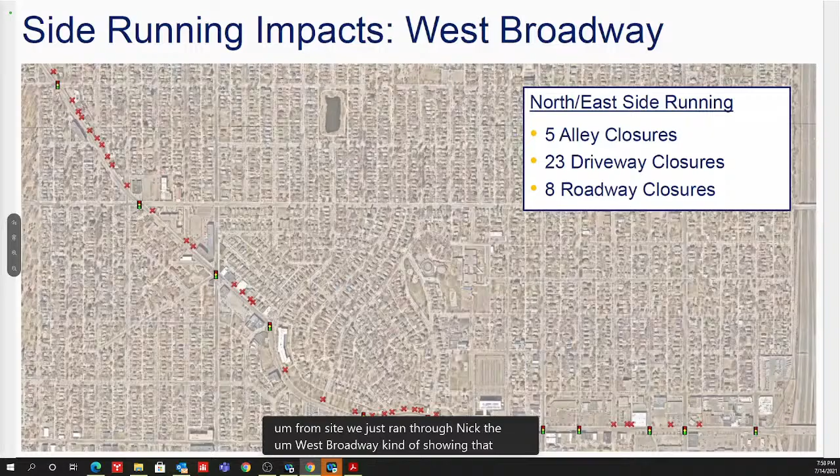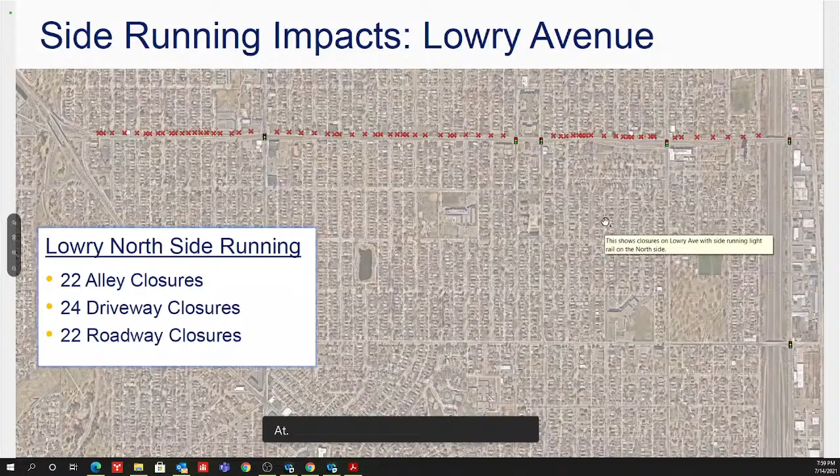So again, it's for discussion. These are comments brought up by the community to have us take a look at. We want to make sure we're showing that and having the discussion on it and getting more feedback. But any questions or concerns on the side running?

Yes. As a matter of fact, Washington Avenue is one where we have a visualization for it. We didn't include it in this presentation, but as you get farther north with the Washington alignment, we're center running on Washington, but as we get farther north towards Lowry, we'll probably have to cross the tracks on a separate bridge or separately from being in the roadway, like Dan said before. It really wouldn't work going through the intersection there.

So at that point, as we get farther north, I'm forgetting the exact street, we would probably shift over to side running, closer to 94 in that green area, and then bring it over on a structure in that area. So yeah, we can combine them if the conditions are right. Okay, thank you.